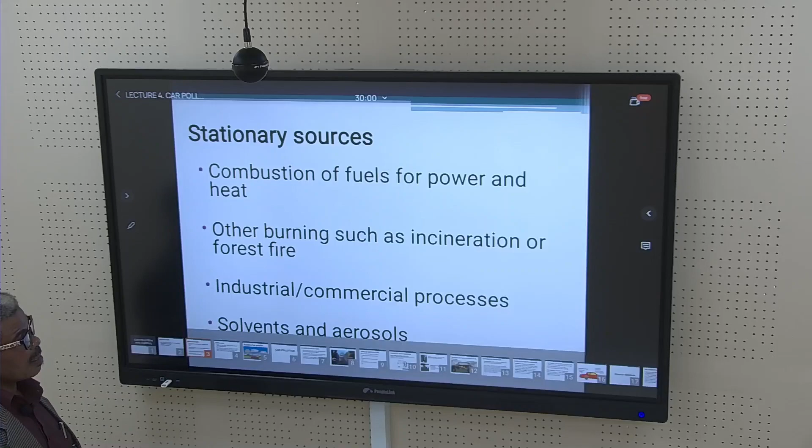With the stationary sources, this means that the combustion of fuel for power and heat leads to the stationary source. And other burning, such as incineration or forest fires, also group under the stationary sources. Industrial and commercial processes, and solvents and aerosols, are in the group of stationary sources.

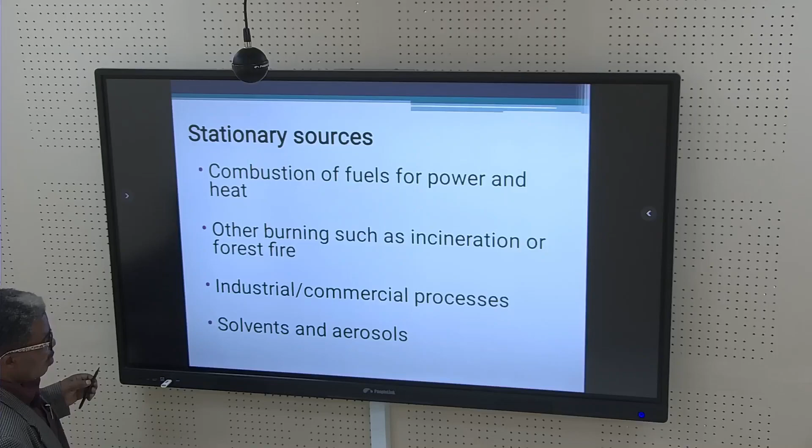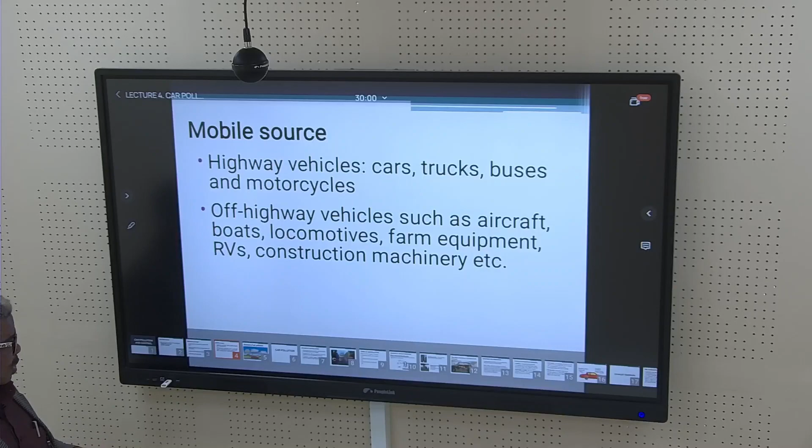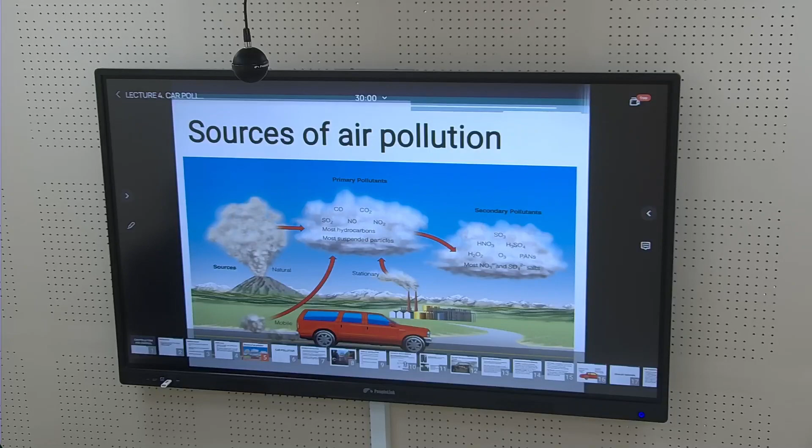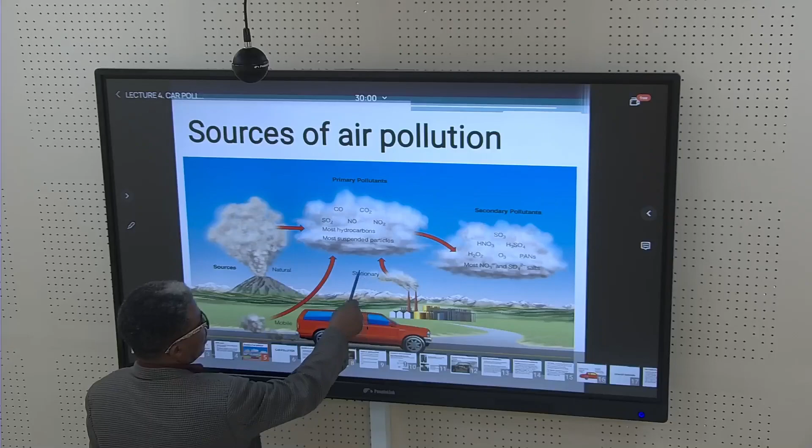So the sources of air pollution: some are natural, some are man-made. For example, here, this is natural, due to volcanic activities. You can see a car here. From its exhaust, there is emission of some gases. This is stationary, a factory. You can see the gases that are emitted here: sulfur dioxide, nitrogen oxide, carbon dioxide, carbon monoxide. These are the primary pollutants. And for secondary pollutants, you can see here.

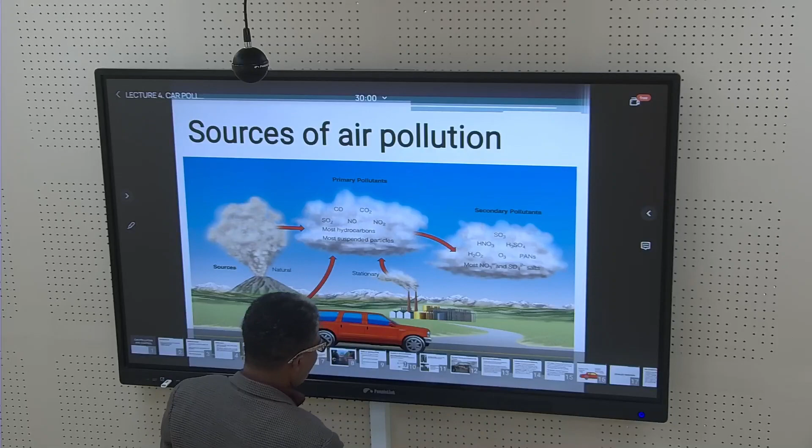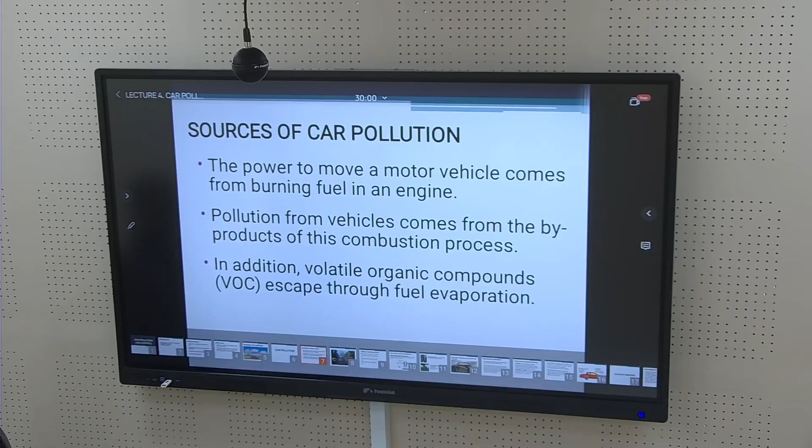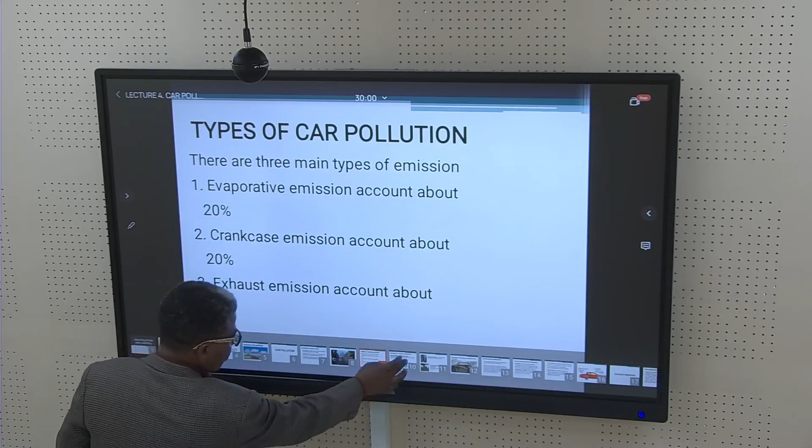See here, I wanted to show how air enters the combustion chamber, the place where the burning takes place, where there is fuel and an ignition or spark from the spark plug, that is electricity, to cause the burning, which results in pressure pushing the piston downwards. The piston is connected to the shaft. This crankshaft transfers the power to the gearbox. The gearbox then transfers it to the tires, which causes it to move.

But in this engine, there is one inlet that causes the air to enter the combustion chamber, and the exhaust. Now I want to focus on this exhaust, where the burnt gases move out after burning. We call it exhaust. So the exhaust is what we would like to discuss, and see how it impacts our environment.

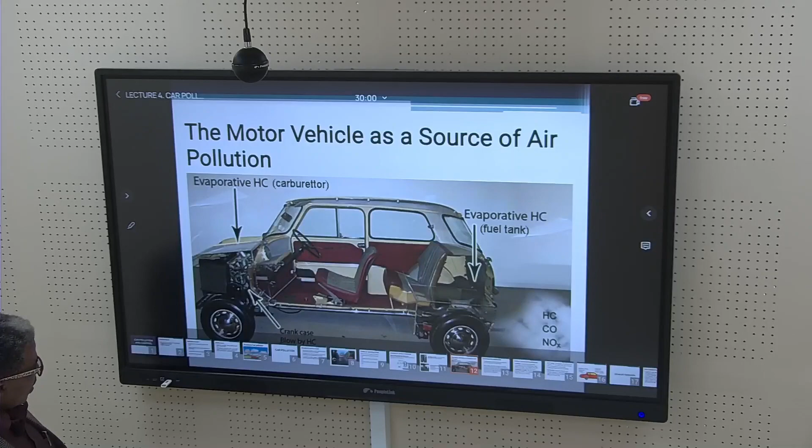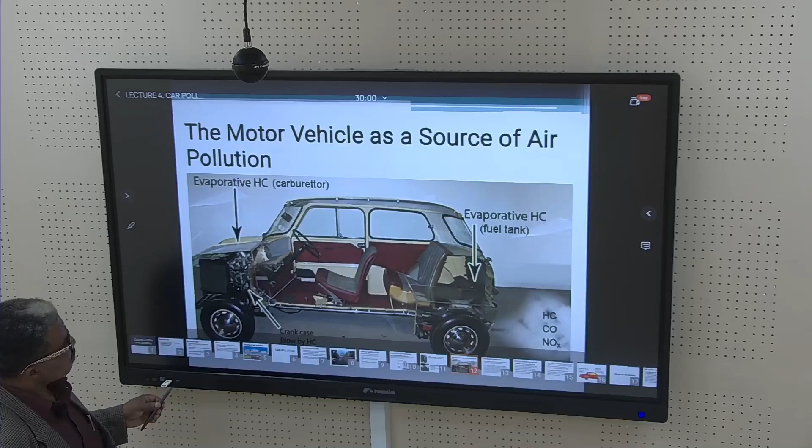So evaporative emissions: hydrocarbon pollutants also escape into the air through fuel evaporation. With today's efficient exhaust emission control and today's gasoline formulations, evaporative losses can account for a majority of the total hydrocarbon pollution from current model cars on hot days when ozone levels are highest.

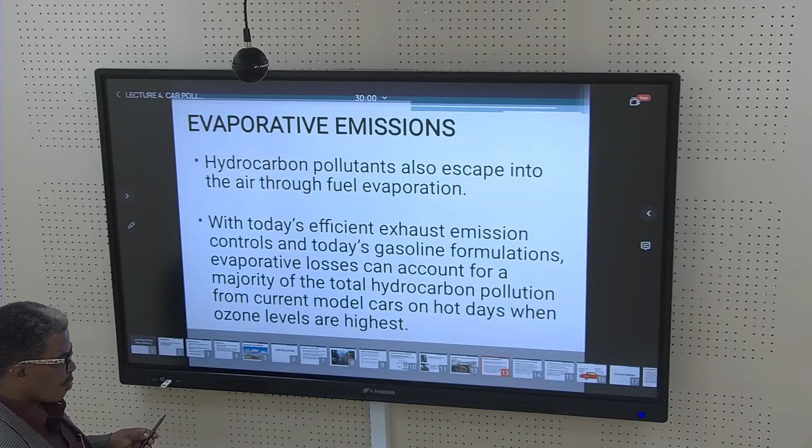So evaporative emissions: do you know that gasoline evaporation increases as the temperature rises? I've talked about it, that if you happen to leave petrol in an open container in the daytime, you can come and find nothing in it, because all of it can evaporate. So running losses: the hot engine and exhaust system can vaporize gasoline when the car is running. So there are diurnal and running losses.

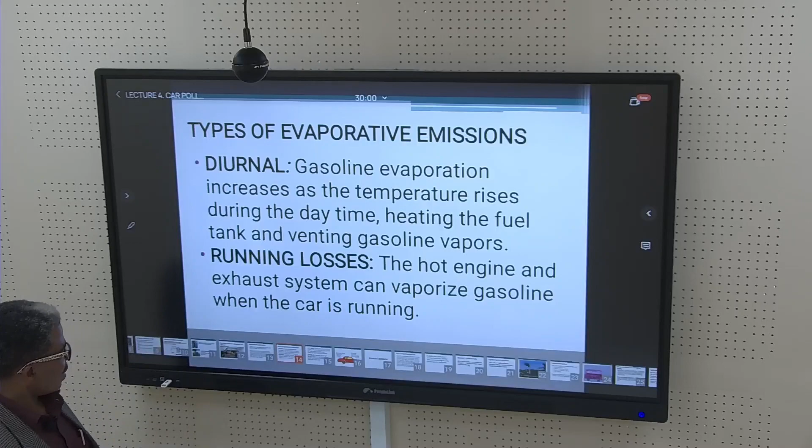Hot soak: the engine remains hot for a period of time after the car is turned off, and gasoline evaporation continues when the car is parked. Mind you, this fuel requires a certain temperature to remain in its state. But if the temperature rises, it tends to evaporate. That's hot soak.

So it can evaporate even when the car is not running, when it has been parked, only because there's a change in temperature. Refueling: gasoline vapors are always present in the fuel tanks. These vapors are forced out when the tank is filled with liquid fuel. So they also contribute to car pollution.

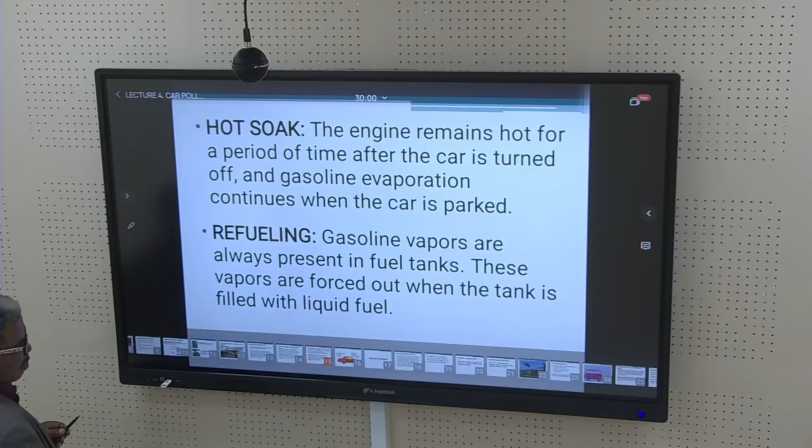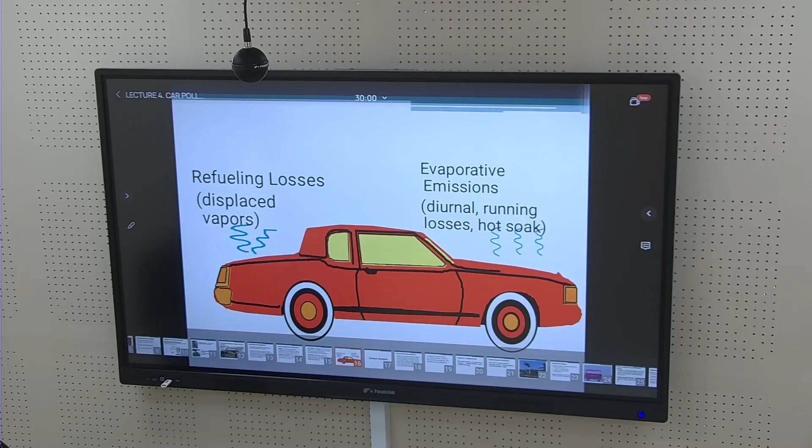See here, refueling losses, displaced vapors. Evaporative emission: diurnal, running losses, hot soak. So you can see how the two are grouped, refueling losses and evaporative emission. Let's now see the exhaust emission. So our major focus dwells here.

The combustion process. Gasoline, or petrol, and diesel fuel are mixtures of hydrocarbons, compounds which contain hydrogen and carbon atoms. In a perfect engine, oxygen in the air would convert all hydrogen in the fuel to water and all the carbon in the fuel to carbon dioxide. Nitrogen in the air would remain unaffected.

If the engine would be perfect, it would make sure that oxygen in the air is all converted. Oxygen in the air ensures the hydrogen in the fuel is converted to water, and all the carbon in the fuel is converted to carbon dioxide. Then nitrogen, which is in the air, would not have been affected at all.

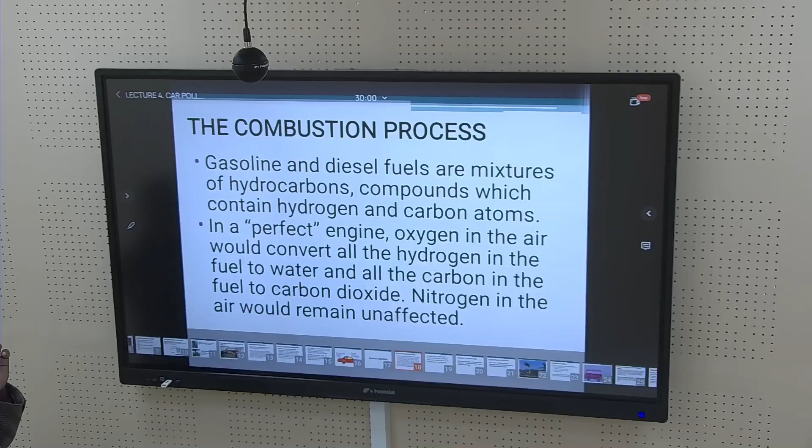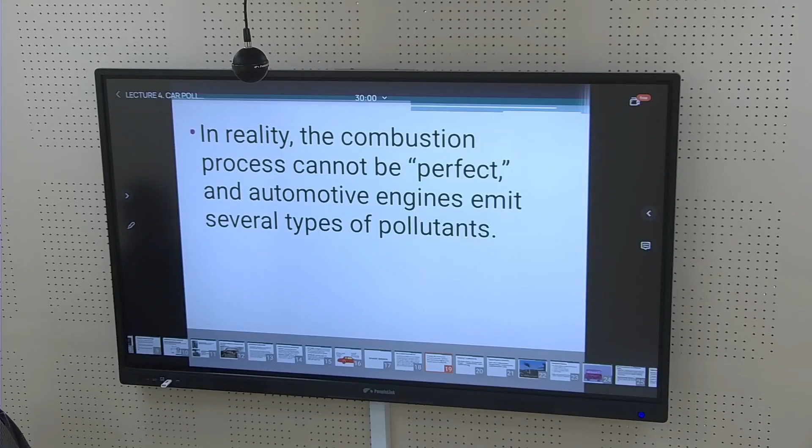But in reality, the combustion process cannot be perfect, and automotive engines emit several types of pollutants. Because it cannot be a perfect engine by 100%, some tend to give us pollutants. If it would have been perfect, it would not give us the hydrocarbons.

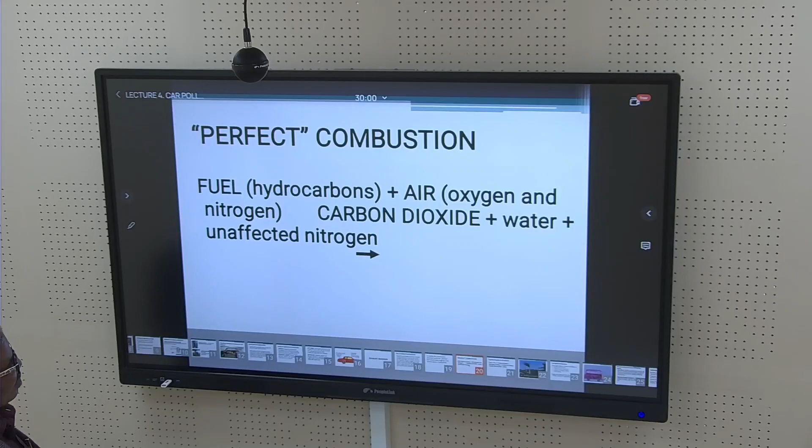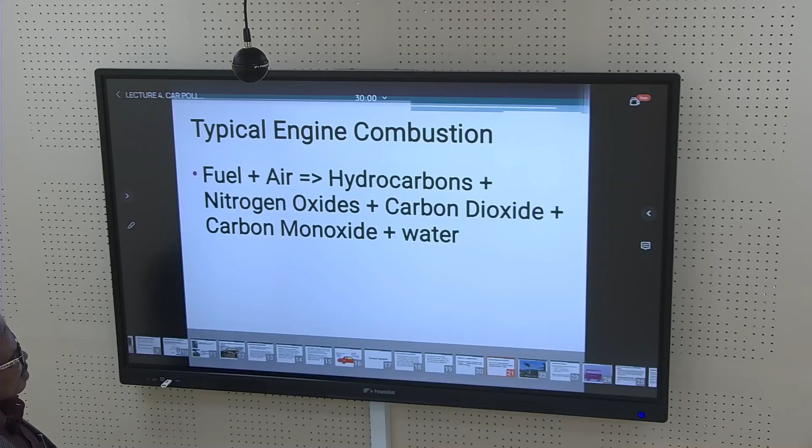So the typical engine combustion, that is fuel plus air, gives you hydrocarbons, nitrogen oxides plus carbon dioxide plus carbon monoxide plus water, in reality or in normal circumstances. Let's now indicate this clearly. So, exhaust emission.

There are 4 basic types of exhaust emissions: hydrocarbons, HC, carbon monoxide, CO, oxides of nitrogen, NOx, and particulates. Gases are released from the tailpipe while a vehicle is operating. Exhaust emissions.

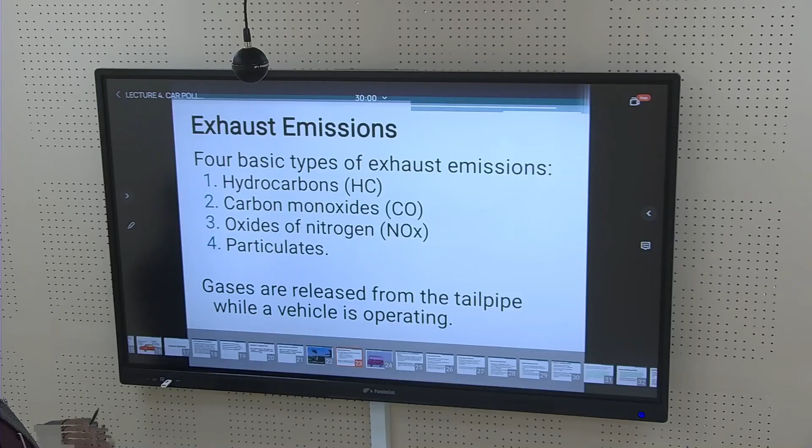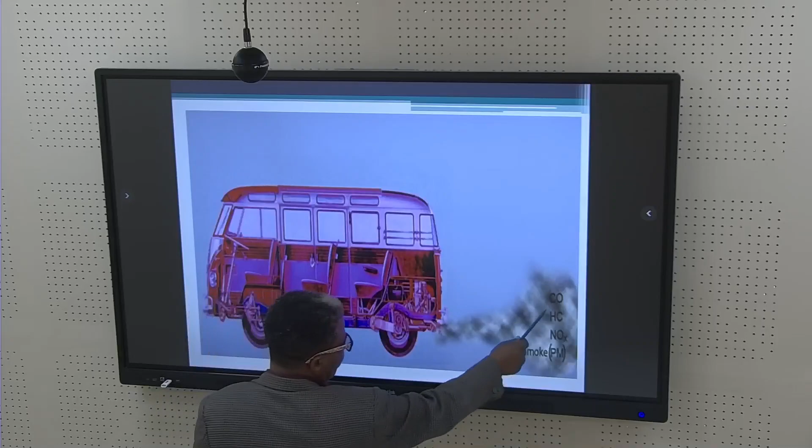So this is a vehicle showing how emissions are being produced. You can see at the exhaust there are a lot of pollutants: carbon monoxide, hydrocarbons, nitrogen oxide, and smoke, PM. Exhaust emissions occur during two modes. There are two modes for emission that can be noted.

During cold starting and driving a vehicle, the first few minutes result in higher emissions because the emissions control equipment has not yet reached its optimal operating temperature. So at the initial stages, a lot of smoke will be noted from the exhaust system because the control equipment has not reached its operating temperature. So it requires heating up.

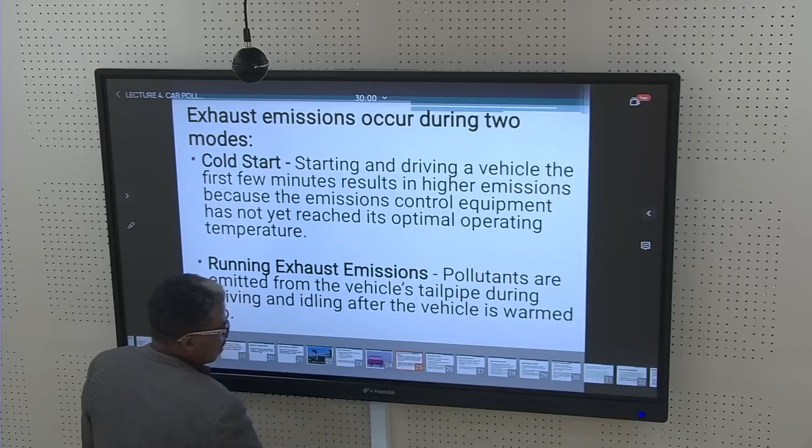Running exhaust emissions: when the car is running, pollutants are emitted from the vehicle's tailpipe during driving and idling after the vehicle is warmed up. So hydrocarbons, HC, and the others behind.

Carbon monoxide, that is CO, is an extremely toxic emission resulting from the release of partially burned fuel. So if you talk about carbon monoxide, incomplete burning has taken place. So it's very dangerous for humans. Carbon monoxide prevents human blood cells from carrying oxygen to the body tissues.

Symptoms are headache, nausea, vomiting, blurred vision, and fatigue. Basically, a stoichiometric quantity of the oxidizer is required. This is the amount needed to completely burn a quantity of fuel.

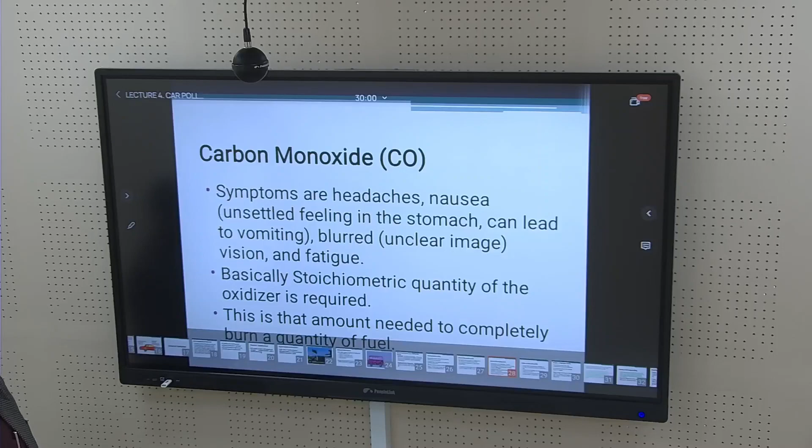For carbon monoxide, if more than the stoichiometric quantity of oxidizer is used, the mixture is said to be lean. That means the mixture is not rich enough to ensure complete burning. If more fuel is supplied, the mixture is referred to as rich. A rich air-fuel mixture would increase carbon monoxide. A lean air-fuel mixture would lower carbon emissions.

Oxides of nitrogen. Here the oxides of nitrogen are produced at extremely high temperature during combustion. Air consists of about 79% nitrogen and 21% oxygen. When heat is above 2500, nitrogen and oxygen in the fuel mixture combine to form nitrogen oxide emissions.

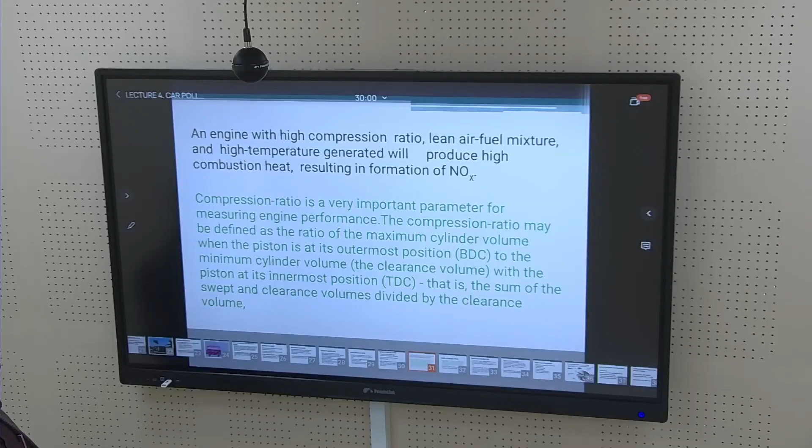Oxides of nitrogen. Petrol engines have a compression ratio of about 7:1 to 10:1. But to produce self-ignition of the charge, diesel engines usually double these figures and may have values of between 14 and 24. Exposure to high levels of nitrogen dioxide may lead to lung damage and respiratory diseases.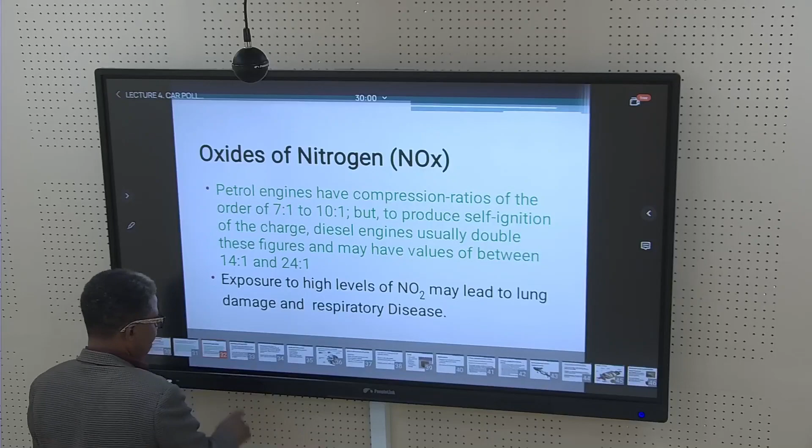Particulate matter, PM, pollution consists of solids and liquid droplets, up to 10 micrometers in diameter, suspended in the air.

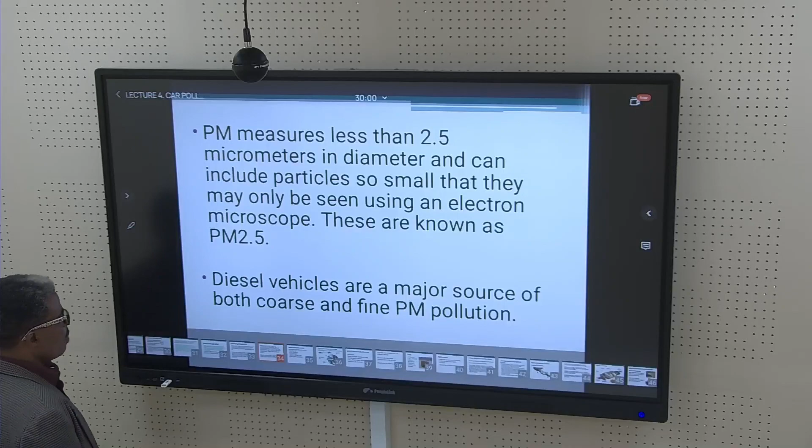PM measures less than 2.5 micrometers in diameter and can include particles so small that they may only be seen using an electron microscope. These are known as PM2.5. Diesel vehicles are a major source of both coarse and fine PM pollution.

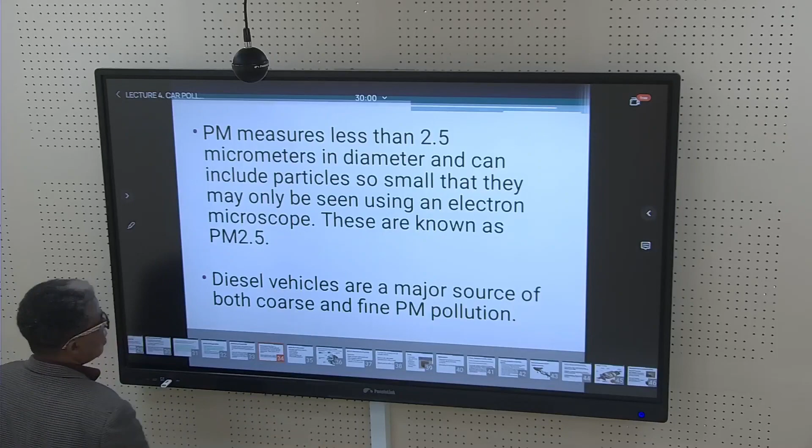Health effects of fine particles: long-term exposure is linked to lung cancer, heart diseases, lung diseases, asthma attacks, and other health problems.

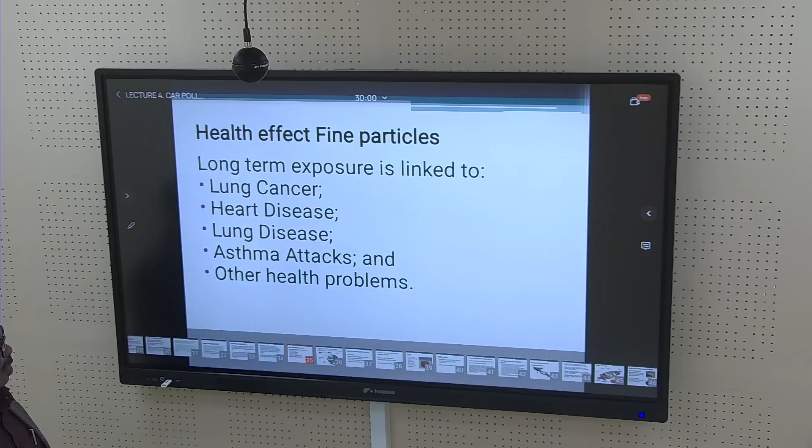Ways of reducing car pollution: this is very important to note. You have to drive less. In order to ensure reduction of car pollution in our environment, we need to drive less.

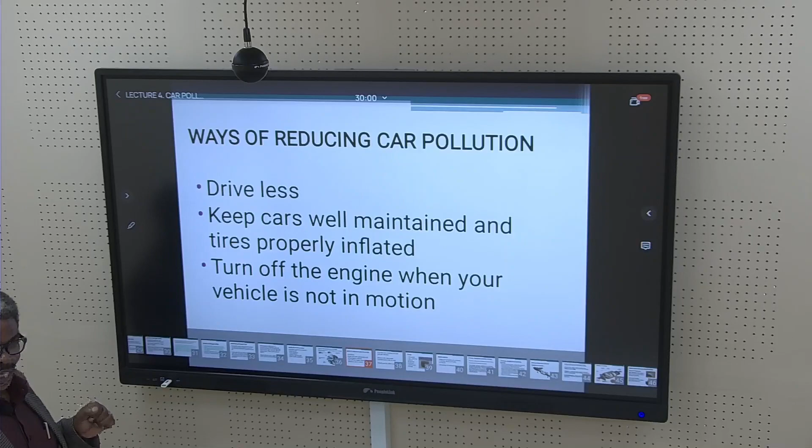Keep cars well maintained and tires properly inflated. Turn off the engine when your vehicle is not in motion, and purchase low-emitting and fuel-efficient vehicles.

Share a ride, take public transportation, bike or walk. Refuel your car after 6 PM.

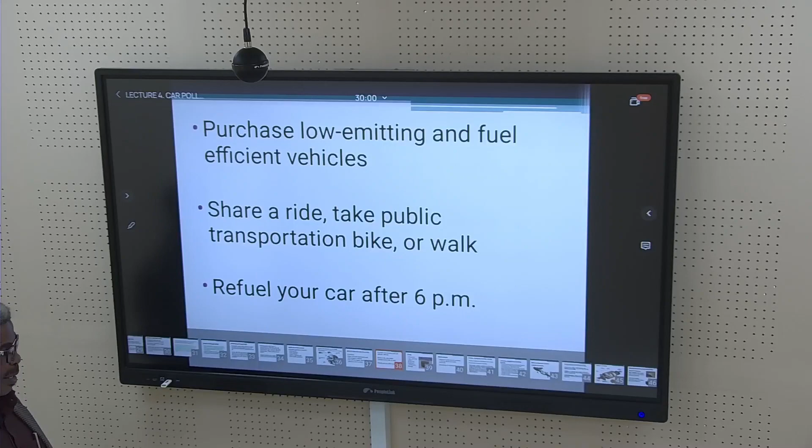Let's talk about fuel. Fuel quality, low sulfur content, biodiesels, additive conditioners, and storage should be kept in mind when dealing with fuels.

Maintenance: adequate maintenance is essential to limiting diesel particulate emission. Scheduling of maintenance is very important to ensure reduced car pollution.

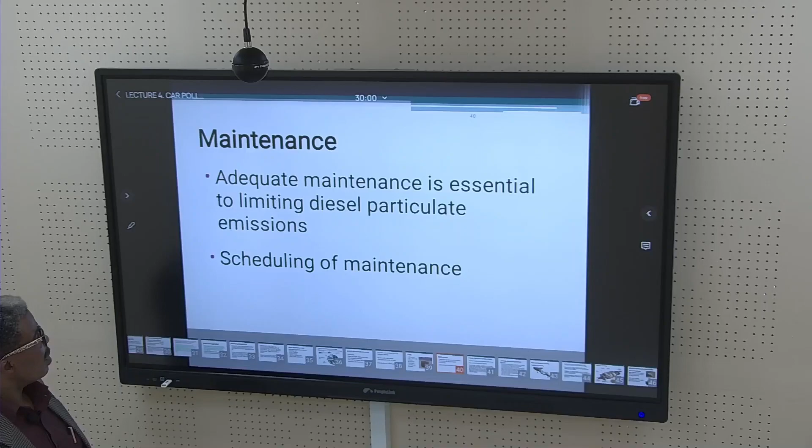Typical emission control device: the positive crankcase ventilation valve. How do we control these emissions that are emitted through the exhaust system? There is a positive crankcase ventilation system.

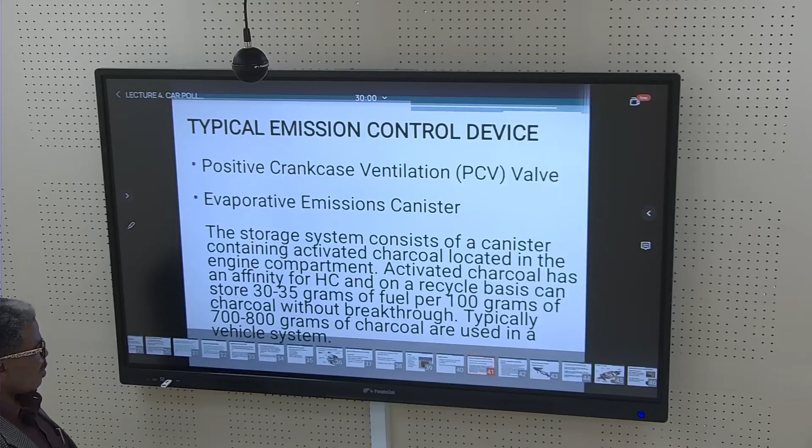PCV, evaporative emission canister should be employed. The storage system consists of a canister containing activated charcoal located in the engine compartment. Activated charcoal has an affinity for hydrocarbons, and on a recycle basis can store 30 to 35 grams of fuel per 100 grams of charcoal without breaking through. Typically, 700 to 800 grams of charcoal are used in a vehicle system.

Exhaust gas recirculation, EGR valve, recycles a portion of exhaust gas to the inlet charge, increasing dilution. This reduces the peak combustion temperature, since the recirculated exhaust gas acts as a heat sink. This also reduces oxygen availability.

About 15% recycle will reduce nitrogen oxide emission by about 80%. The maximum percentage which can be recycled is limited by rough engine operation and loss of power.

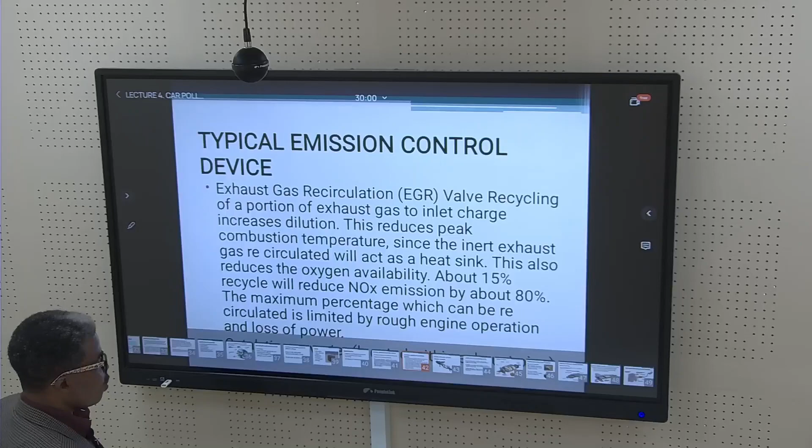Vehicle emission control: this device is termed catalytic converter, sometimes called the engine muffler. It is kept between the engine and the exhaust pipe leading the smoke or emission of gases. They burn out the gases, but before coming out, these gases have to pass through this device.

The name catalytic converter comes from the word catalyst, a substance that speeds a chemical reaction without itself being changed, coated with a ceramic honeycomb. Catalytic substances such as platinum and palladium treat hydrocarbons and carbon monoxide emissions, while rhodium acts on nitrogen oxide emissions.

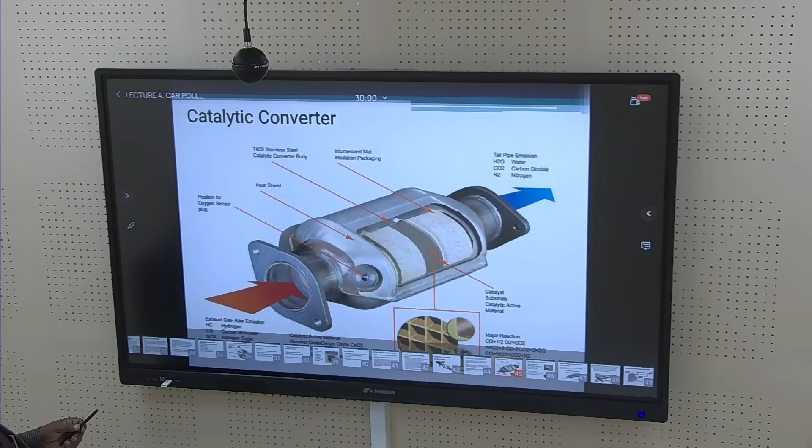So this ensures more burning of carbon monoxide into carbon dioxide, more burning of hydrocarbons to split into carbon dioxide and water, and splitting of nitrogen oxide into nitrogen and oxygen. That is the importance of having the catalytic converter for reduction of car pollution.

I would like to discuss the different types of converters in vehicle emission control systems: the three-way catalytic and the two-way catalytic converter.

However, principally they work on the same principle, to ensure more burning of the pollutants before coming out of the exhaust system.

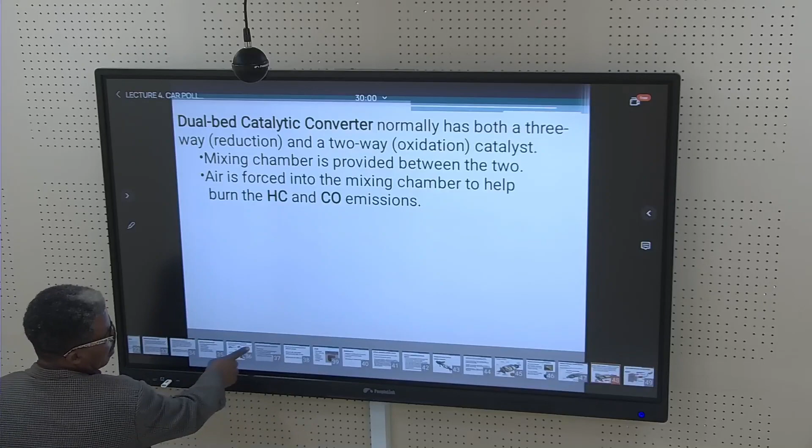A dual-bed catalytic converter normally has both a three-way reduction and a two-way oxidation. This means you can reduce or you can oxidize. A mixing chamber is provided between the two. Air is forced into the mixing chamber to help burn the hydrocarbons and carbon monoxide emissions.

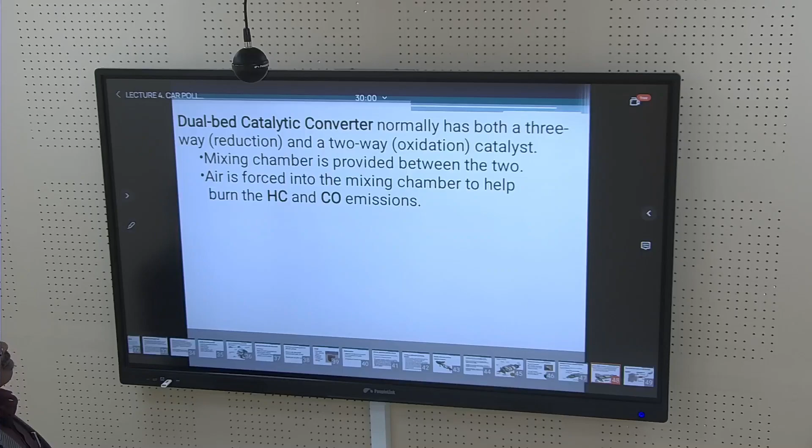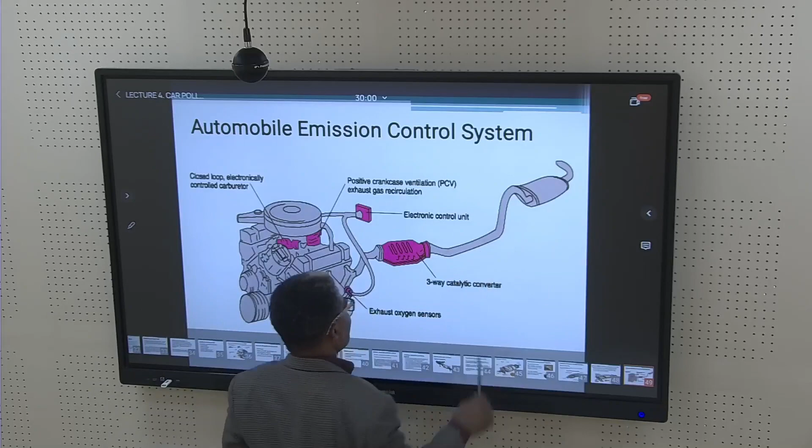Mind you, this also has an impact on the generation of power. If the vehicle does not have this device, there will be a reduction of power. So it's very important to have this. If you go for service, make sure the muffler is working properly, as it ensures the effectiveness of the power generated is put to use.

Thank you. That makes it the end for car pollution.